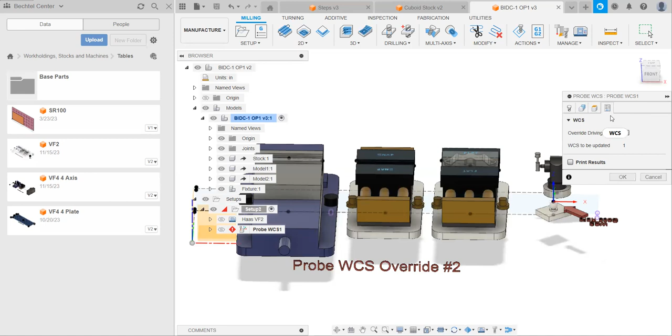Heights is going to be a couple of settings that say, hey, here's where it's safe to be above the stock, and you're not going to crash into anything. You can move as fast as you'd like. And then there's, okay, start machining at the top here, and then go down to here. Heights manages all of that. And the last tab, we have the WCS. In other tabs, this is replaced with a passes and a linking tab. But because probing is a little bit weird, it doesn't have that.

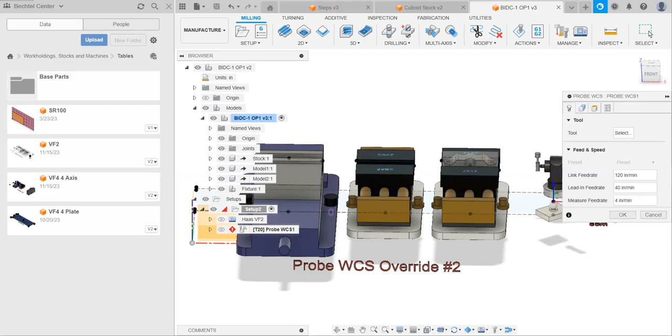Cool, let's just go through and set up our probe for our tool. On this side, I'm using the VF2 and VF4, so I'm going to go down here, and I'm going to select our probe standard. I'm going to select this, and then select, and there you go. You can leave these at the default preset for probing. Next thing is our geometry. In this case, I want to probe the top face first. Like this. You see that it defaults to probing X and Y first before probing Z. Actually, this operation doesn't even probe Z. We're going to make a separate operation for that.

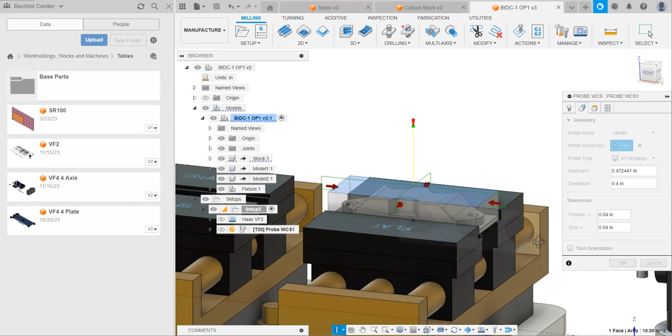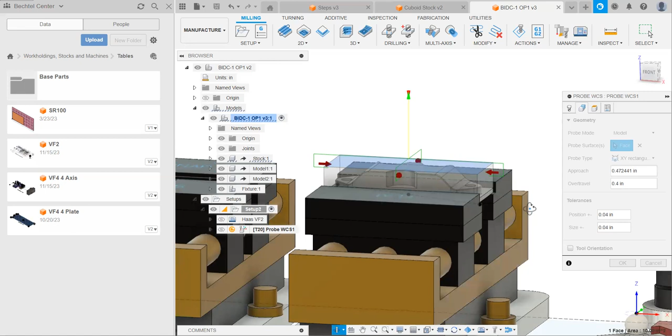And I like to probe Z first. The reason for that is that if our X and Y offset is wrong, let's say that our part is shifted too far to the left, then our X and Y probing is going to fail. But our Z probing is probably still going to work just fine, because it doesn't care whether it touches down in the middle here or off to the right here. But if our Z height is wrong, if the stock is, say, too tall, then our XY probing might crash into the stock, and that's not a good thing. Or if our stock is too short, it might just miss it entirely. So basically, I like to do Z because there's less things that can go wrong.

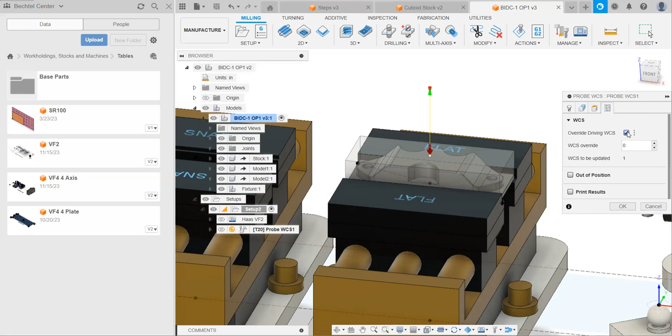Then in heights, these look like good heights. And then in WCS, we need to click Override Driving WCS and change it to 2. And if you ever forget, there's a nice large red text right here: Probe WCS Override, should be number 2. Great, now I can press OK. And then we can repeat this step for XY probing. And you saw that it had already selected the same tool as before, and that's because it just tried to pull the tool from the previous operation.

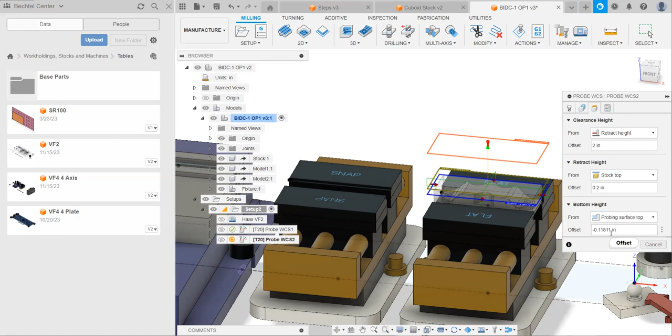Cool. In this case, we would like to keep our XY rectangular boss, so just probing X and Y. Height is fine. You'll see here the probing surface top with bottom height is now moved down very slightly. And you can see that here, because if it wasn't moved down at all, then it would just skim over the top of the part and not actually hit it, which is not what we want. And then once again, we can use Override Driving WCS and change this to 2.

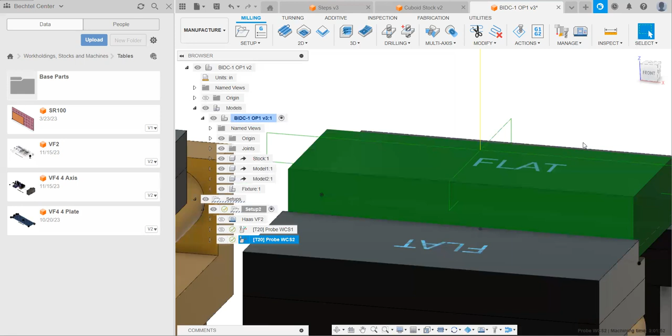Cool. At this point, this is a quick tutorial on how to set up probing manually. However, we do also have a probe template. And the way you can access that is by right-clicking on your setup and clicking Create from Template, XYZ probing. See that it creates Z probing and then XY probing in that order.

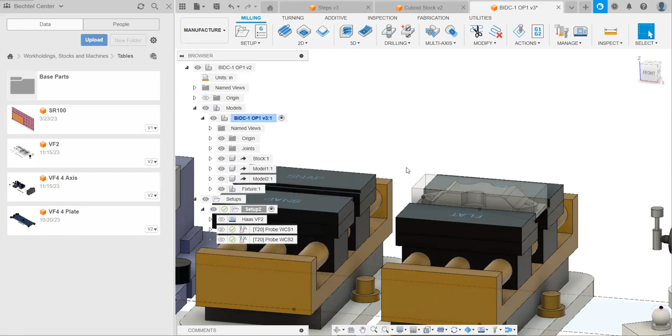Now, I'd like to show you the simulation engine that's built into Fusion. To use it, select your setup, and then go into Actions, Simulate. Cool. A couple of notes about this. Down here, we have our playback controls and our speed controls. This button is our start simulation. This is also our speed slider.

This is very fast. This is moderately fast. This is stopped in the center. This is moderately fast, but time is going backwards. And this time is going backwards extremely fast. I'm going to set it to a pretty slow speed and then show you the rest of the simulation.

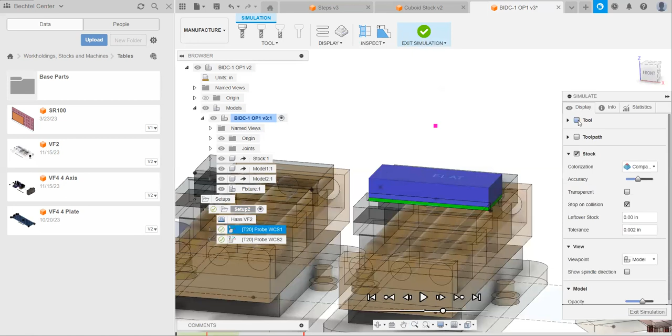The important things are, this is the tool. It either shows you the entire tool or just the tip of the tool. Usually you want the entire tool displayed so that if the holder of the tool is set to collide with something, you can see that it's going to do that. Next thing is this tool path, and it's going to show the path of the tool. I prefer to leave it off, but some people prefer to leave it on, so take your pick and see which one you like more.

Next thing is the stock. This one, I would highly, highly recommend your stock colorization be set to comparison. And the reason for that is that comparison will show you where you have more material you need to take away, you're already at the correct size, or you've taken away too much material. In this case, you can see this green band along the bottom. That means that the material is already the right size.

But up here up top, you'll see that there's blue material. That means I need to do more machining. I need to take away more material. And then finally, you shouldn't really ever see this, but if you ever see this red, it means you've taken away too much material, and you probably need to go back and figure out why.

This accuracy slider will determine how accurately Fusion simulates your stock. The lower the accuracy, the better the simulation runs, but also the worse some things, especially holes, will look. So in general, try and have it as high as you can while Fusion can still run at a reasonable pace.

And then over here, we have stop on collision. This means that if something collides with something else, Fusion will say, hey, something's colliding, and then stop the simulation. If you have this unticked, Fusion will say, hey, something's colliding, and then just keep on going. And that's not what you need. You want it to actually stop and show that there's a collision. You need to actually investigate why. Because collisions are not good.

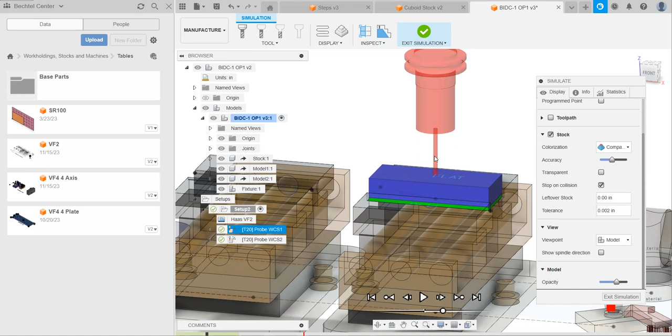Cool. We can start by pressing Start Simulation. See that this is the Z probing, so it's going to come down. It's going to touch off the top of the material. See that the tool turned red, the simulation stopped, we have a collision. So Fusion gets a little bit antsy when probing, because by definition, a probe needs to collide with the material. Otherwise, it can't know where the material is, and so it can't do its job.

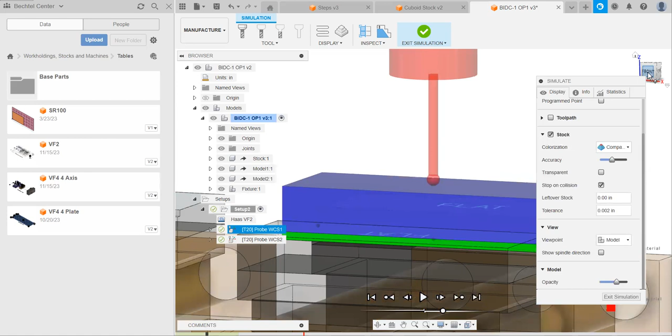However, it is always a good idea to check whether this is just a Fusion being antsy issue, or if this is an actual collision. And the best way to check is to look at the probe like this. You can see that the probe is just barely touching the top of the stock. It's not actually going in and gouging a deep hole. That's good. That means it's probably just Fusion being antsy. That's fine. You can start simulation again and continue on.

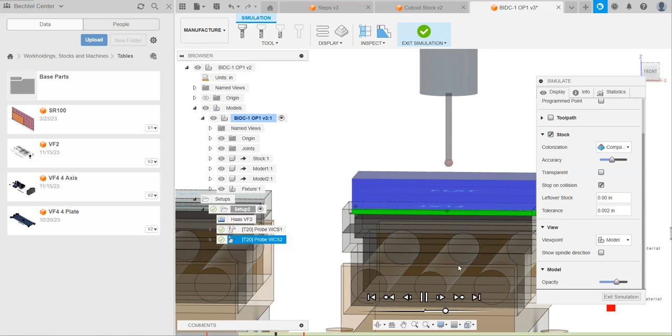Cool. Now that first operation finished, and we're going to go into our second one. And now once again, we have a collision. So let's look at it from the side. And we can see that, once again, we're just barely touching. So we can safely say that this is Fusion being antsy.

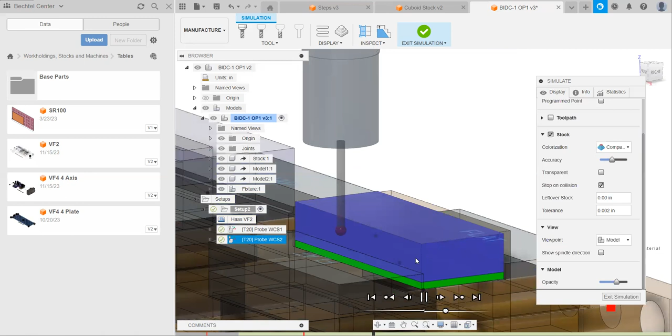Cool. In the simulation, you can see the exact path the tool will take. And when you actually start machining, you can see what the final part should look like after you're done. This is very helpful for making sure that you don't miss any spots, that you're doing things in the best possible operation order, and that you're not colliding with anything.

Excellent. Thank you for watching this video and learning about the probing and the simulation engines.